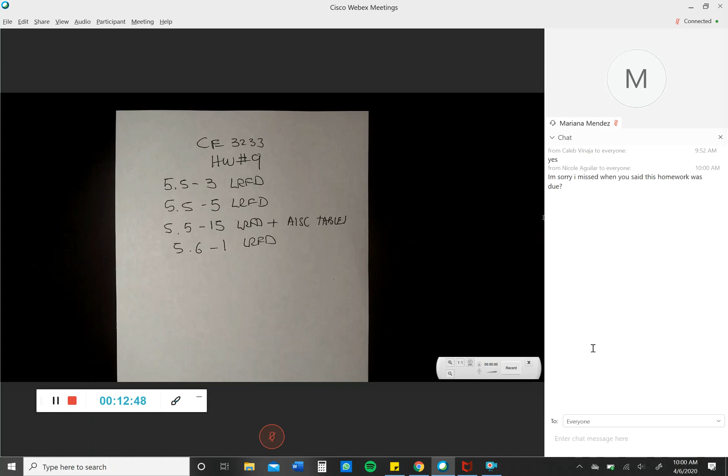No, Nicole, I have not said anything yet. We haven't started. We start at 10. Now I'm going to say, okay, welcome everybody to one more week of suffering online.

This homework is going to be due the Monday after the exam. This homework has to do with beams. Beams is not included in this exam, so this homework is due the Monday after the exam. The only thing included in the exam is the bonus from exam number one, and everything related to weld and columns. So beams are not part of the exam, but this homework is due the Monday after the exam.

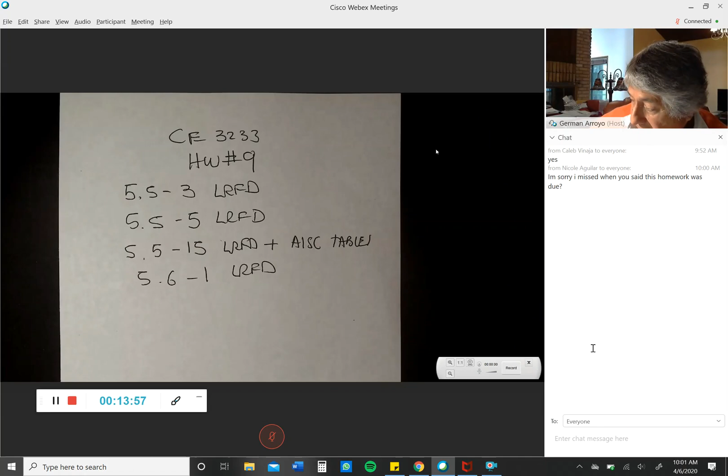I want you to pay attention to what I have to say and show you. I know you're worried about the exam and stressed out because of too many online courses and family problems. I understand, and I'm going to try to help you, so pay attention. I know some of you are still in bed, some are still driving, some will be here later asking about this.

Look, number one, the exam is going to be open notes, open book, open solution manual, everything is going to be open.

However, number two, don't talk to anybody, don't help anybody, help yourself. Because if you work as a group, somebody's going to tell me, and all of you, one of the group is going to get an F. If somebody asks you a question on the phone, say no. I'm trusting you. Number two is the most important part of the exam.

The exam will start at 7 o'clock. You're going to download the first question from the folder. Before that, please turn that mic off. Turn that mic off. So the first question—I don't know who you are, Amira, I think—turn that mic off.

So the first question, next week on Tuesday at 7 o'clock in the morning, you're going to download the first question. I will also display the first question on this screen, so you'll have it in front of you for an hour if you need it. Also, the chat is going to be on so you can ask me questions, but you'll have to turn your mic off during the exam and keep your webcam on so I can see you.

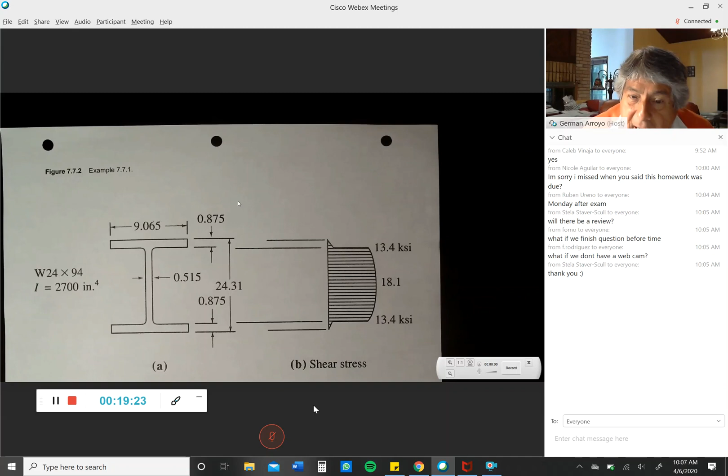What I want you to understand is that for a wide flange beam, and you remember this from mechanics of solids, this is the shearing stress distribution. The shearing stress distribution is always different depending on the cross section, it has a different shape. The cross section used most for beams is a wide flange. If you remember, it's zero on the outside, maximum at the neutral axis.

But most of the shear stresses are resisted by the web. So the code assumes that the web, all the depth times the thickness of the web, is resisting the shearing stresses. The code assumes this is a rectangular shape, because most of the shearing stresses are resisted by the web. The code assumes that the web is resisting all the shearing stresses.

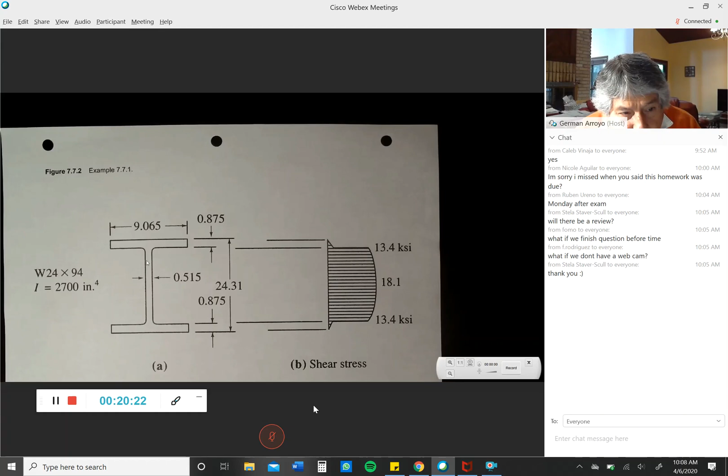So I want you to go to chapter G, page 16.1-70. Chapter G, 16.1-70.

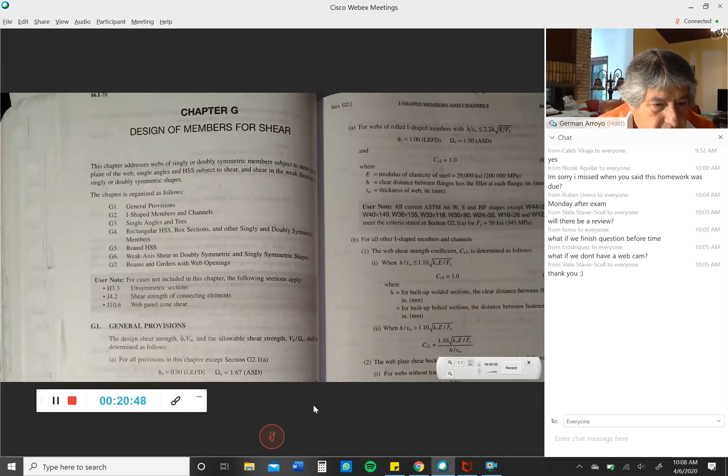For shear, you have to be very careful, because for LRFD you have to use phi equals 0.9 with the section given on the next page. The shear strength equation, this is the nominal strength, is 0.6 Fy times Aw, which is the area, the depth and the thickness of the web.

I'm going to solve the problem related to this on the next page. And you have to be very careful because it's for I-shaped members. This is h over tw. Whenever this is smaller than this value, phi is 1.

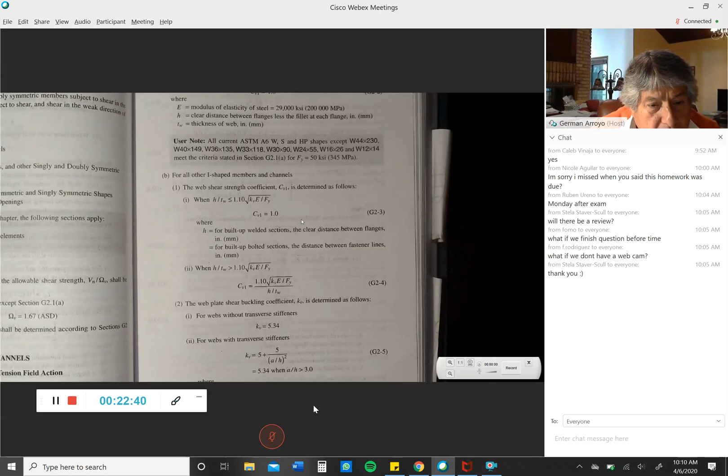Phi is 1 instead of 0.9, and the shear factor Cv is 1. There are other conditions. If you look at this value here, there are conditions where the value of Cv is computed, like given here. We're going to do that later. What is important to know is that the code assumes that all the shear stresses are resisted by the area of the web.

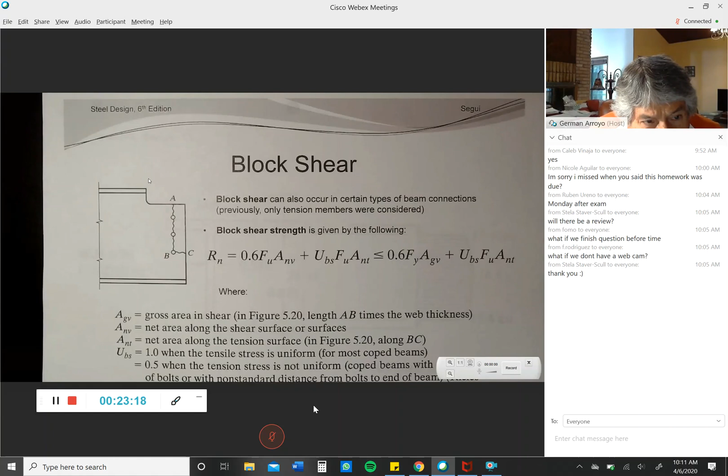Another thing that is important to know: whenever we have beams, you cope the beam to be at the same floor level, you're going to have it here, the flange of a girder. So to be at the same level, you need to cope the beam. In this case, there is a block shear. This is the gross area in shear, the net area in shear, and this is the gross area in tension and net area in tension.

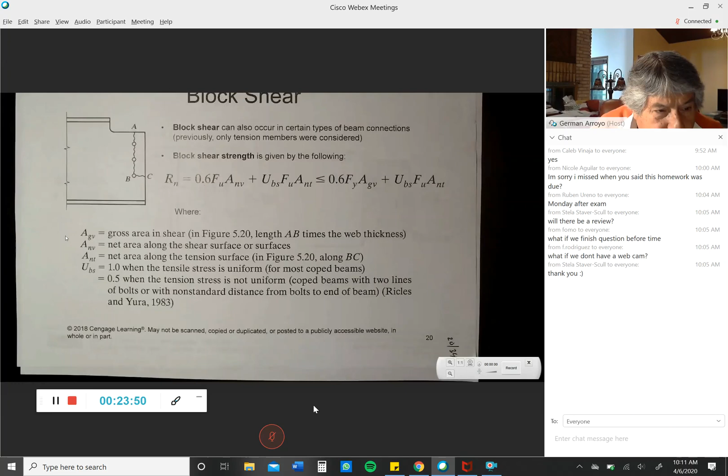And in here, you can see that this is the same block shear equation that we used before, the same definition for the gross area, for the net area. This is important: this value of U still is 1 for most of the cases.

However, based on research, it is 0.5 when we had two lines of bolts. So this is one line of bolts, whenever we had two lines of bolts it would be 0.5. I want you to remember that.

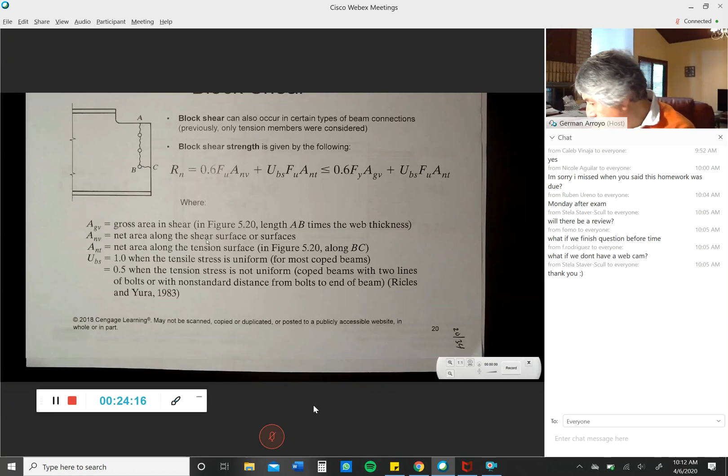And the last piece of information I want to give you is about flexure. Whenever we do beams, we have to check the strength based on moment, sigma equals MC over I. The strength based on shear, we look at the shear stress, tau equals VQ over It, and deflection. Deflection is based on service load, we do not factor the load.

So deflection, whether LRFD or ASD, is always based on service load, we do not factor the load. In addition, normally the dead load deflection, whenever you load the structure during construction, is already taken care of, already taken place. So the only thing we consider is the live load deflection, and you can see that the textbook says the same.

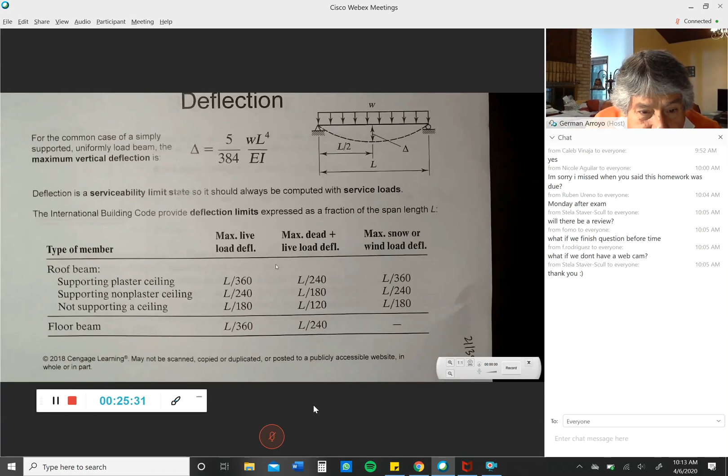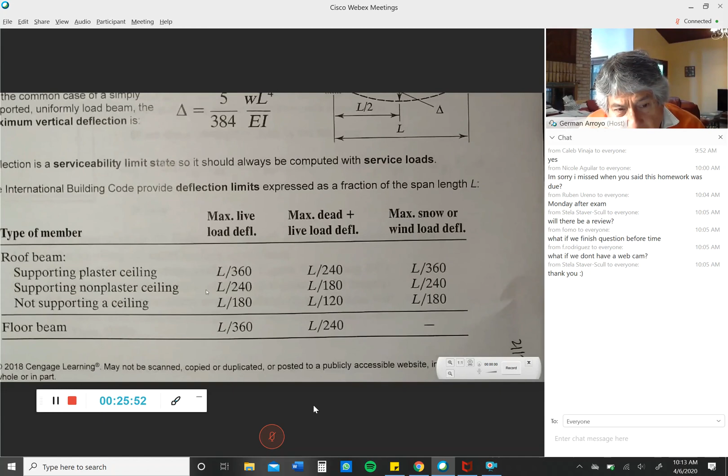So all that we're going to be looking at is L over 360, L over 240. Typical for floor beams, L over 360 and L over 240. But this is just based on live load. And I will tell you to use L over 360 or L over 240, this will be given to you. They have to be in inches, so the span has to be multiplied times 12.

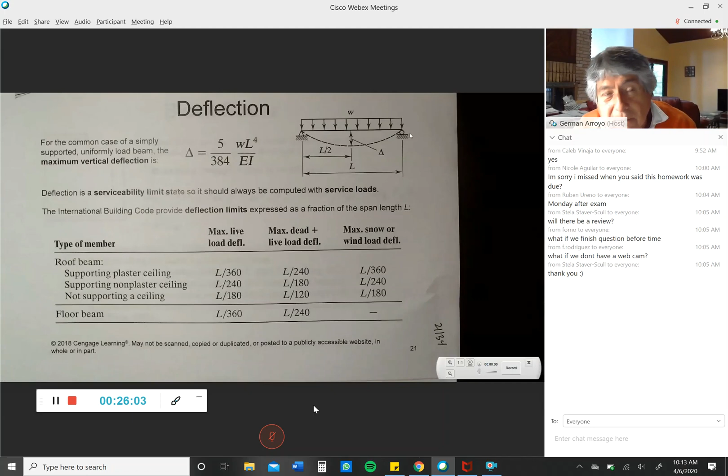But it only uses the live load. And this is a typical formula, you can find this at the end of chapter 3, typical deflection formula, always in inches.

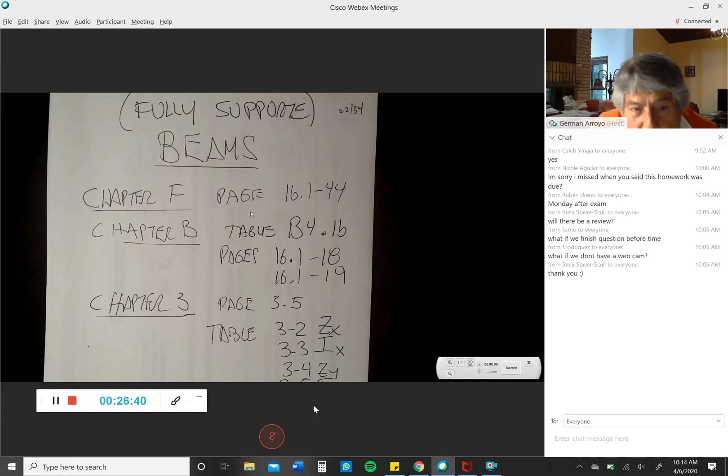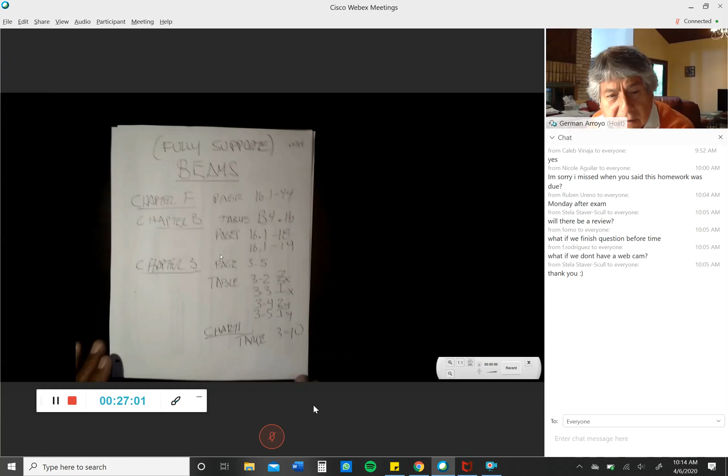So today we're going to do our first design. And like I mentioned to you last week, we're going to be looking at chapter F that deals with bending or flexure, chapter B that had a table for h over tw and b over 2 times the thickness of the flange for local buckling. And in chapter 3, we saw the other day that we had a table for Zx plastic modulus, Ix moment of inertia about the strong axis, Zy and Iy. Later, after our exam, we're going to be looking at different types of beams.

Also, we're going to be using a table in chapter 3. Something that I want to point out in chapter 3, I mentioned it to you before, but now I'm going to show you where to find it. Go to chapter 3, page 5. Chapter 3, page 5.

This is what I showed you before. This is horizontal, this portion is linear, after that comes a parabola. This is when we develop the plastic moment, and in chapter F they call it yielding. This is when phi M sub N is equal to phi M sub P. And this point, if you go down below, corresponds to L sub P.

So all the problems we're going to solve today related to beams have this condition. They call it fully supported compression flange, so the compression flange is not going to buckle. We are not going to have what is called lateral torsional buckling, or LTB. It's not going to happen in this chapter.

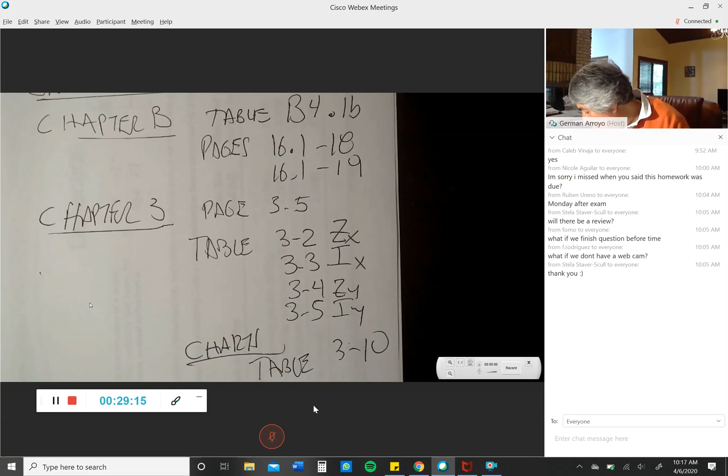Our first problem, this is page 23 of our notes. Here on top it says continuous lateral support. That means the compression flange is not going to have lateral torsional buckling. This is what I told you before, that the compression flange could be encased in concrete. That's called continuous lateral support.

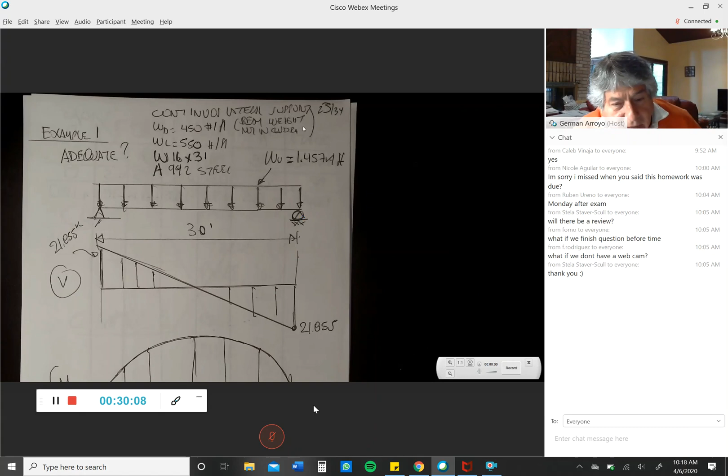We still haven't set here the support. The beam is still determinate. We have a pin and a roller. What they're saying is that the compression flange is encased in concrete.

The dead load is 450 pounds per foot, and the weight of the beam is not included. The live load is 550 pounds per foot. And when you look at this, W16 by 31, that means 31 pounds per foot.

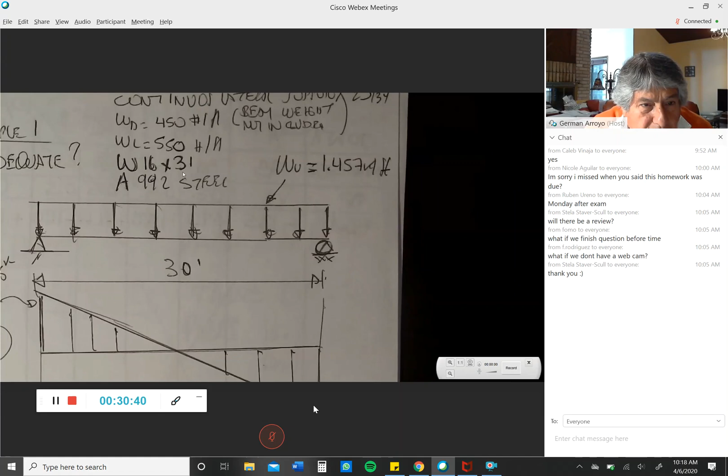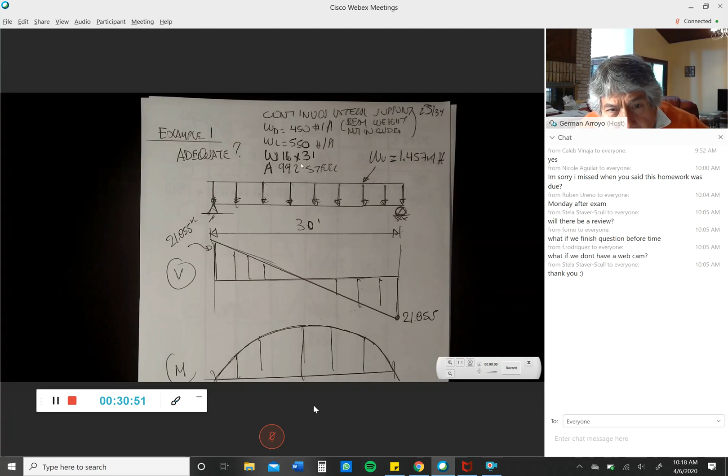So the load we have is 450 dead. I need to include the weight of the beam, 31 pounds per foot, to this dead load. So down below here I have computed W sub U, the dead load per foot in kips. This is the weight of the beam, 31 pounds per foot divided by 1,000 to get kips, which gives me 0.031.

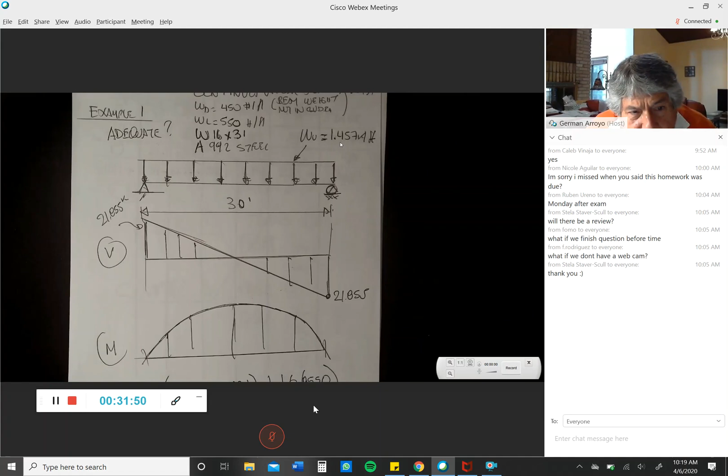Given that load plus the weight of the beam times 1.2, the live load times 1.6, this gives me 1.457 kip per foot. So this is the load that we have, 1.457 kip per foot. If you multiply this times 30 and divide by 2, it gives you the reaction, this value, 21.8 kips.

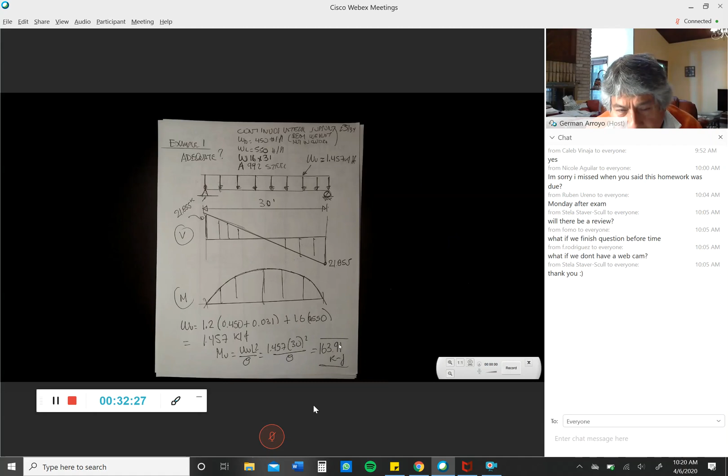This is the reaction. 1.457 times 30 divided by 2 gives you the reaction. The maximum moment is W sub U times L squared over 8: 1.457 times 30 squared over 8 equals 163.91. So we have to provide a moment capacity larger than 163.91, so we need to check.

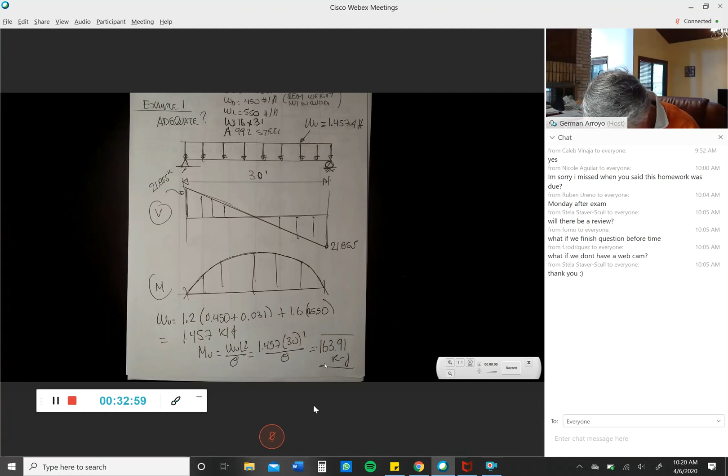They want to know: is this section, the W16 by 31, able to resist 163.91 kip-feet? Since this is fully supported, the compression flange is fully supported, in chapter F they say that the limit state that applies is yielding.

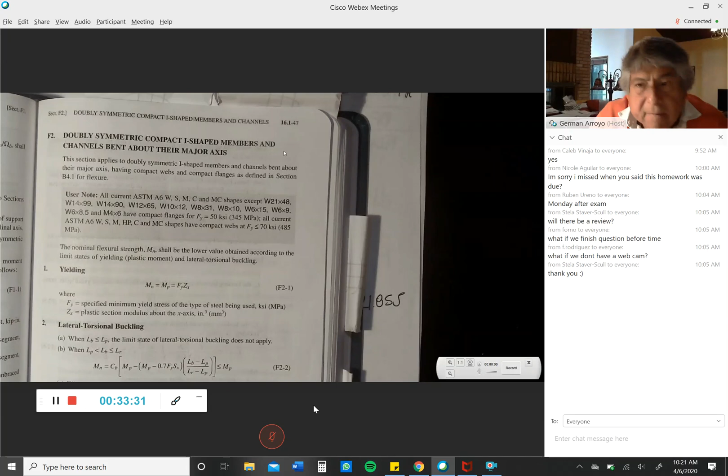So I want you to go to chapter F, page 16.1-47. In this page it says that the limit state yielding applies whenever the compression flange is fully supported, or the bracing of the compression flange is equal to or smaller than L sub P.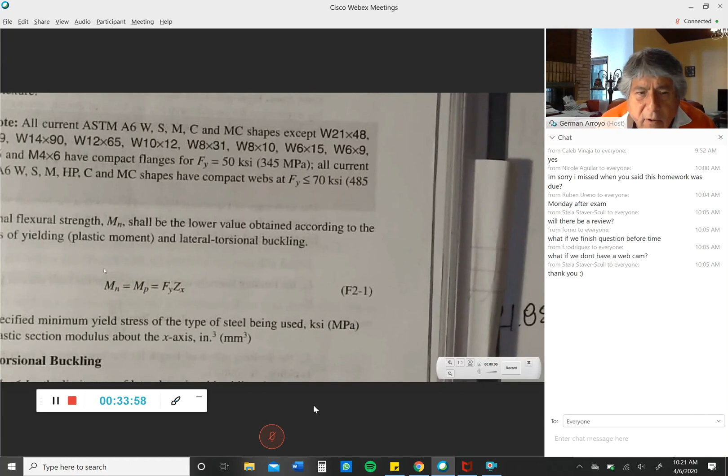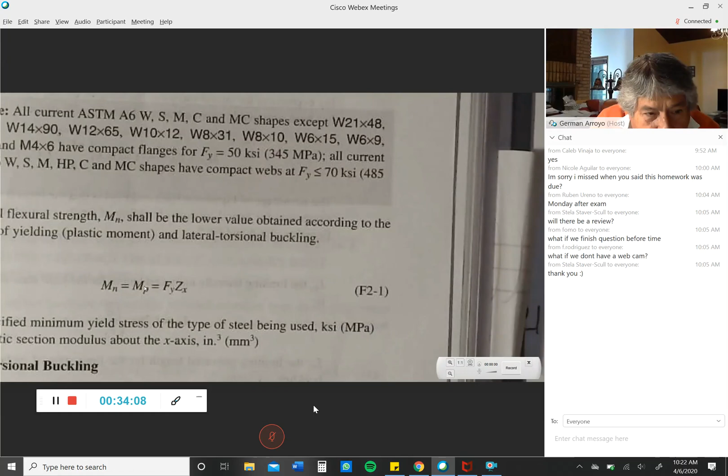In this case, the limit state yielding says that the nominal capacity, for both LRFD and ASD, is the moment that we're going to develop: the plastic moment, fully yielding of the cross section. The shape of the stress diagram on the cross section is rectangular. So for LRFD, phi M sub N is equal to phi M sub P, equal to phi F sub Y Z X.

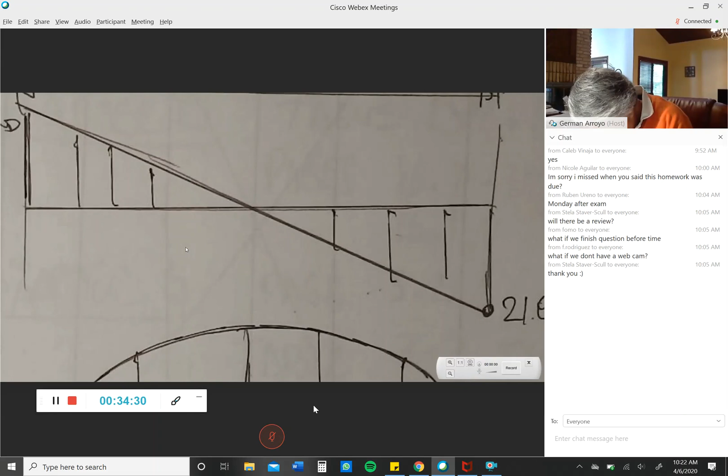In addition, we need to go to chapter B. This is the table in chapter B on page 16.1. This is the table that is for beams. Don't get confused with the previous table that's for columns. Make sure you understand there are two tables, one for columns, one for beams. Beams, we call it Flexure.

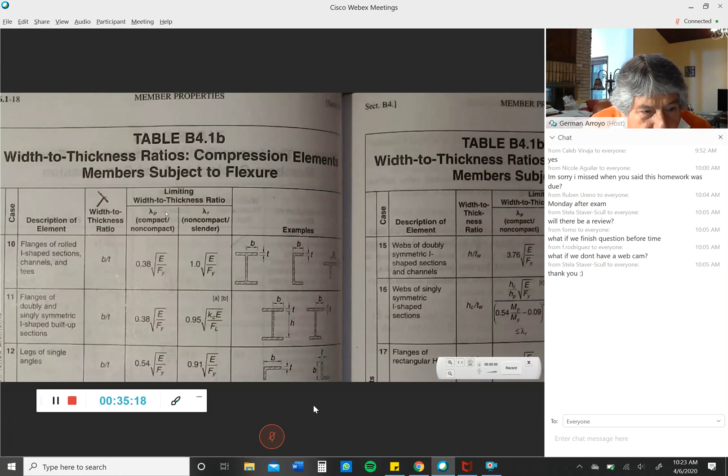So in order for the section we're dealing with to develop the plastic hinge, local buckling should not take place. That's why we have to check B over 2 times the thickness of the flange. Why B over 2? Because look at this, this is what B is in this equation. So B over 2 times the thickness of the flange has to be smaller than lambda sub P, and this is given in chapter 1, this value.

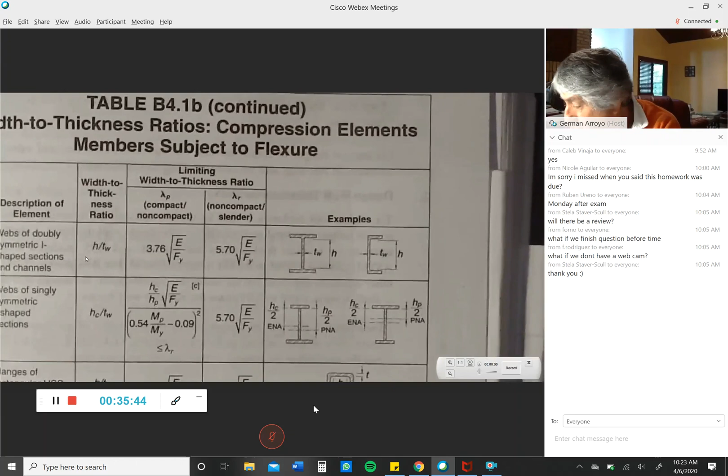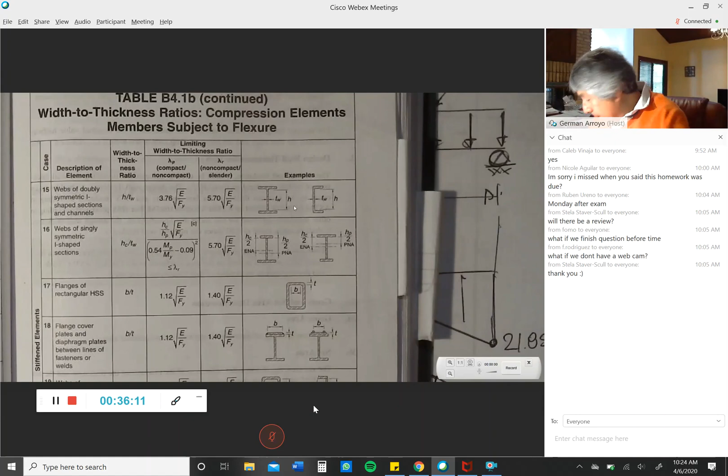For the flanges, on the next page, for the web, we had H over TW. H over TW is smaller than this value, so this is also given in chapter 1. So from chapter 1, we already done it before.

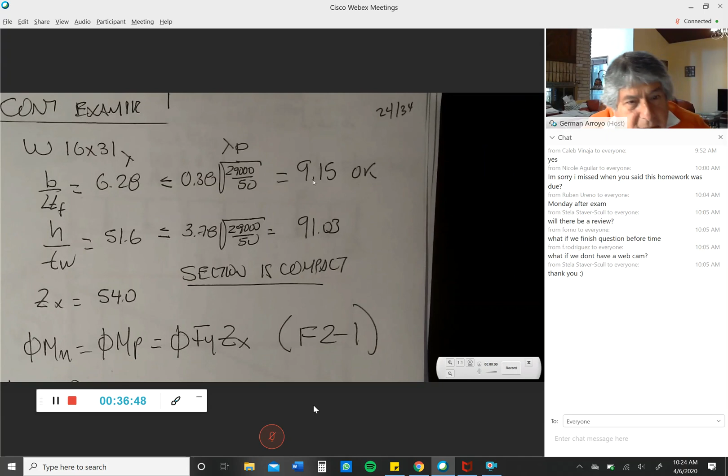B over 2 times the thickness of the flange for the W16 by 31 is given as 6.28. This is our value of lambda. It has to be smaller than 0.38 times the square root of 29,000 over 50, since FY is 50, that gives 9.15. 6.28 is smaller than 9.15, so no problem with the flange.

The web, H over TW, this value comes from chapter 1. For W16 by 31 it has to be smaller or equal to 3.78 root of 29,000 over 50, which is 91.03. It's smaller, so no problem. So the section is compact.

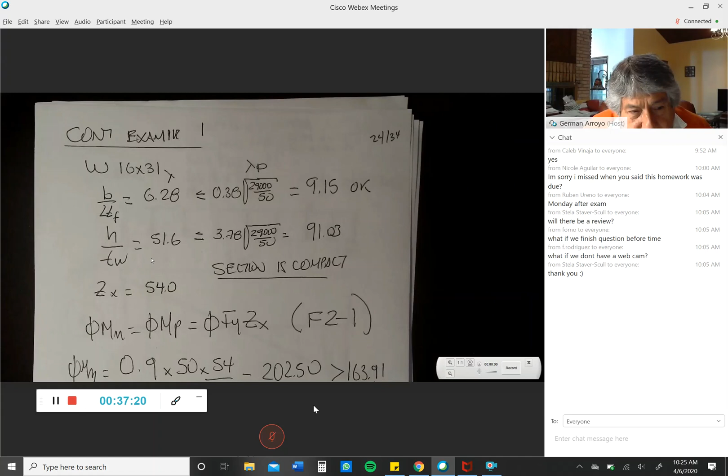This value Zx comes also from chapter 1 or from chapter 3. This is the plastic modulus of this section, W16 by 31. So this comes from chapter 1, whenever we had a 16 by 31, or it comes from chapter 3. I'm going to show you later how to use chapter 3.

Since we have full support of the compression flange, no lateral torsional buckling will happen. We do not have local buckling of either the flange or the web. Yielding is the limit state, this is what I show you.

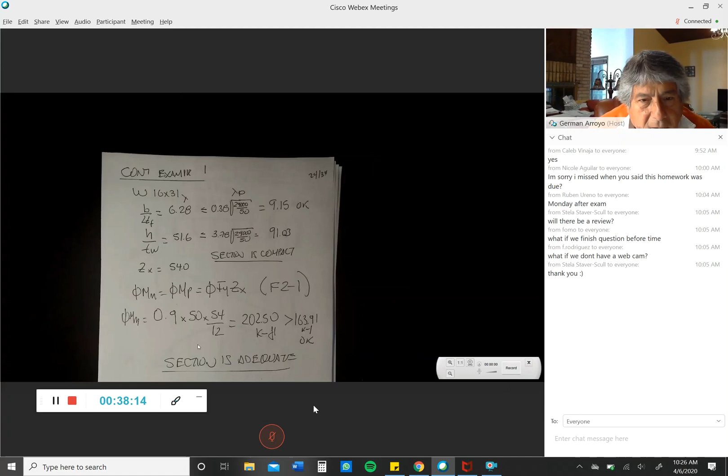Phi Mn equal to phi M sub P, phi FY Zx. And this is the equation in chapter F, F2-1. The value of phi is 0.9, the value of FY is 50, Zx is 54 inches to the third.

You have to divide this by 12. That gives you 202.50 kip-foot, larger than the one that we obtained when we found Mu, so this value here is Mu, that was WL squared over 8. So the conclusion is that the section is adequate.

Any questions about this problem?

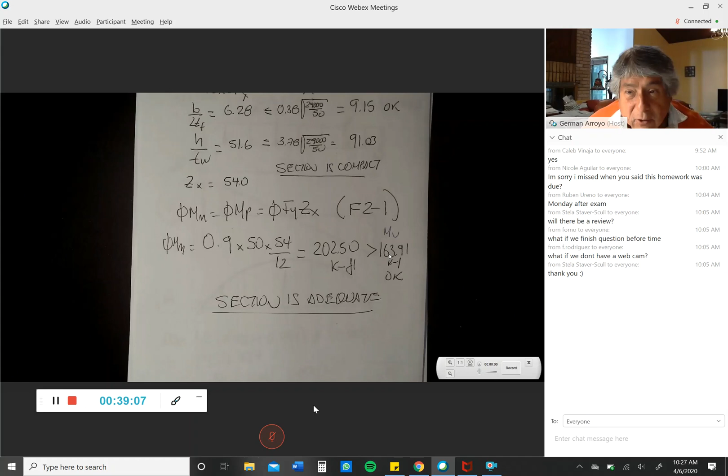It cannot be that clear. Any question? I think that you all went to sleep. I'm going to go to the next problem.

This is page 25, example 2. They give you the W10 by 77. This weighs 77 pounds per foot, and there is continuous lateral support.

In this chapter of the textbook, everything has continuous lateral support, or is braced, compression flange braced at an unbraced length L sub B smaller or equal to L sub P. And you can see this in the field. I don't know if you were able to go to the field or not, but this is very simple, you can see it in it.

So they want to know what is the maximum point load, live load that can be applied to this beam. And this beam here has the load at mid-span. I have factored the live load by 1.6. The only dead load that we had is the weight of the beam.

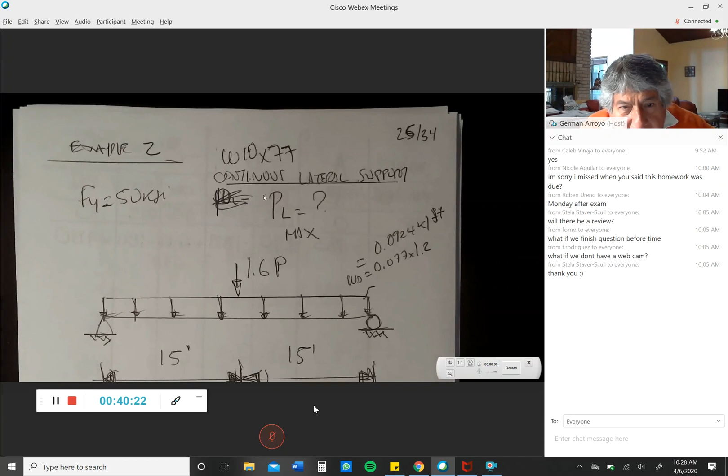So you can see here that I had divided the 77 pounds per foot by 1,000, so I have here 0.077 kips per foot times 1.2. So the dead load is 0.0924 kips per foot. So we have factored the dead load, we have factored the live load, and this is our problem.

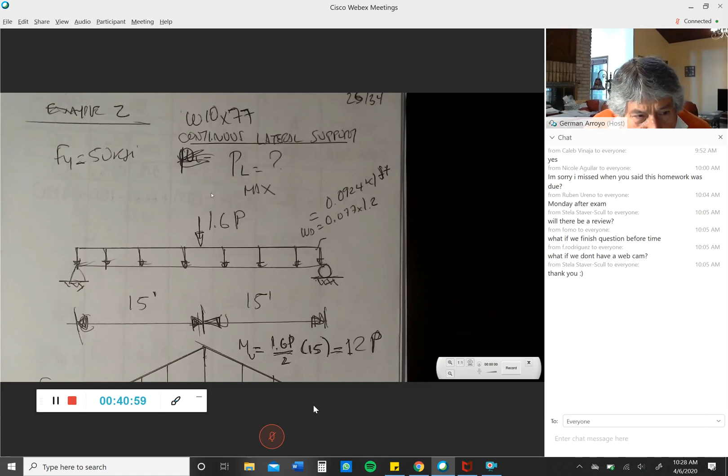I had broken this into two diagrams to add the moment produced by the point load to the moment produced by the uniform load. You have to be good at structural analysis, because if the load is not in the center, you have to find the location in the shear diagram where the shear is equal to zero.

Because when the shear is equal to zero, the moment is going to be maximum. And here, because of symmetry, the moment is going to be maximum at the center of the span. So 1.6 times this load divided by 2 times 15.

So in this diagram, 1.6P divided by 2 is this reaction. Multiply times 15 feet, this moment here, in terms of P, is 12P.

The moment produced by the uniform load is still Wu times L squared over 8, 10.40. So the moment that I had to design for is 12P plus 10.40 kip-foot. This is just structural analysis, and I know that you're very good at this.

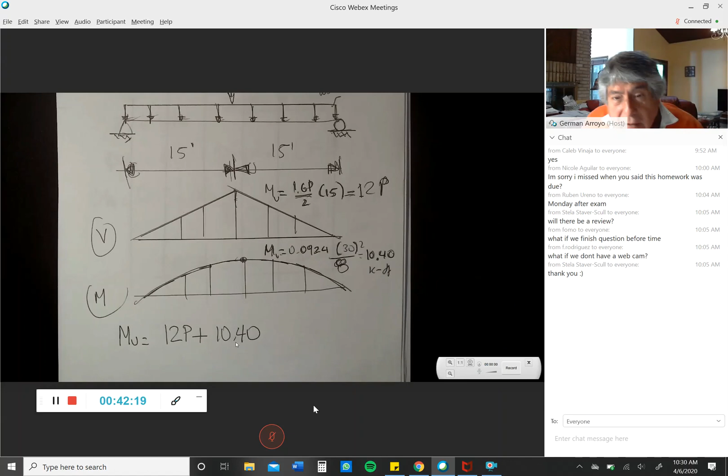So what we had to do, we had to equal the moment capacity of the W10 by 77 to the required moment, that is 12P plus 10.4. And this is what I had done on the next page.

Can we use table 3-23? Right now I want you to use calculation. It's good for you to understand how to do the calculation. I always want you to do calculation. Whenever I tell you don't use calculation, use a table, I will point that out. But I'm glad you asked that.

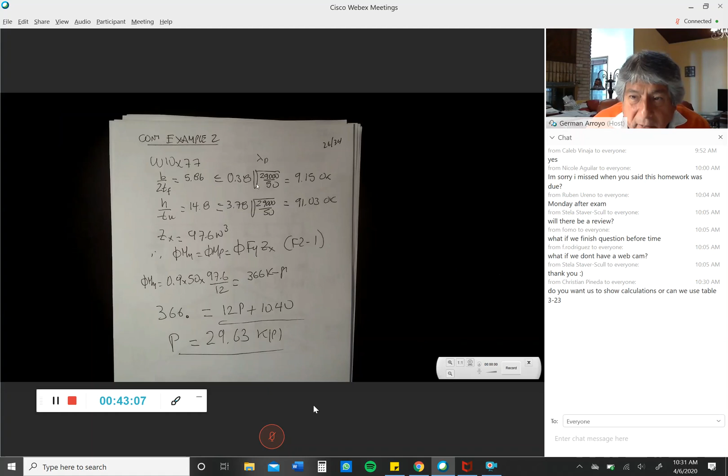Okay, so look, chapter 1, W10 by 77, B over 2 times the thickness of the flange is smaller than this value, no problem with the flange. H over tw, 14.8 is smaller than 91.03, no problem with it.

ZX comes from chapter 1 or chapter 3, and this is the equation. We do not have problems with the flange, no problem with the web. And fully supported compression flange means no lateral torsional buckling.

Yielding is our limit state, the same as before. The nominal strength equal to the plastic strength, phi FY Zx. The Zx came also from chapter 1, or it could come from chapter 3, from table 3-2. I'm going to show you that much later.

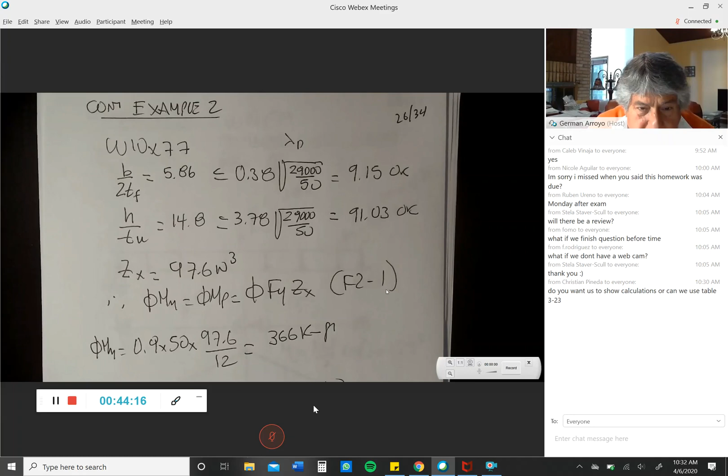So we have 0.9 times FY ZX divided by 12 — don't forget to divide by 12 — giving 366 kip-foot. We're going to make this equal to the required moment, and from here it came to 29.63.

Now we're going to go to table 3-2, chapter 3, page 3-23. This is the table for ZX that I mentioned last week.

In this table, ZX is only for 50 KSI. For yielding, the equation we're using is a linear equation because phi M sub n equals phi M sub p. Phi is a constant, Fy is a constant, Zx has nothing to do with the type of steel — Zx is a property of the geometry. So the only thing we need to do to the value here for phi M sub p for any type of steel is divide it by 50 and multiply by the required Fy.

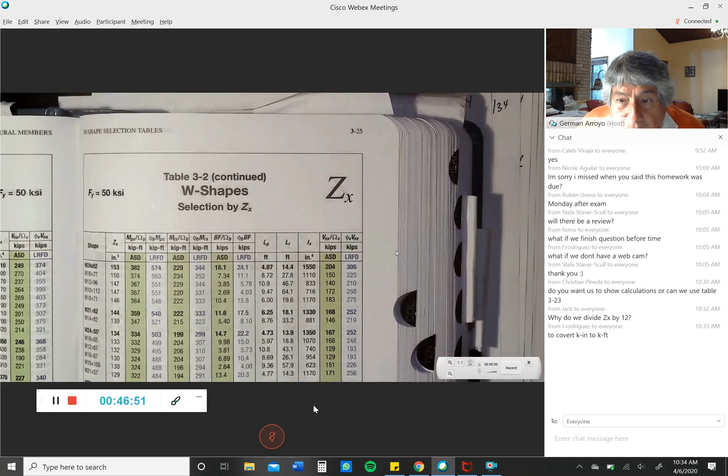On page 3-25, go to page 3-25. We always use kip-foot. Somebody — I think Fernando Rodriguez — is answering the question. Yeah, because let me finish with this. I'm going to go back to show you the unit.

At the bottom of this page, we had a W10 by 77. What is the value? Anybody type, what is the value of phi M sub P that we had in here? 366. And what is the value that we computed? Look — exactly the same value.

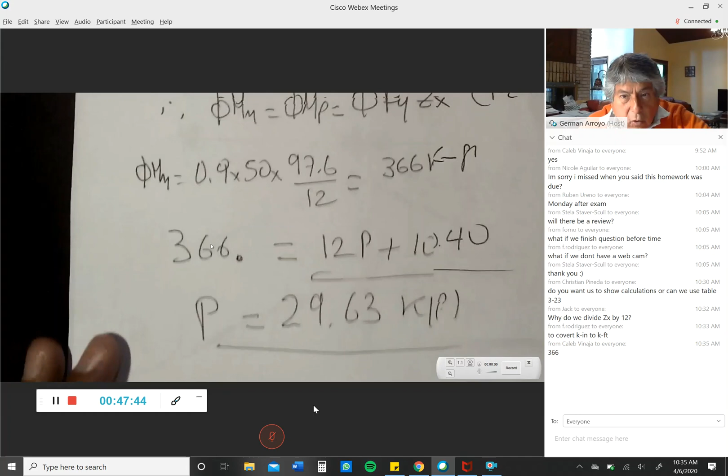So we're going to use this table, but right now I want you to know where this value comes from. There is a question about the units. Look, 50 is kip per inch squared, and this is inches to the third.

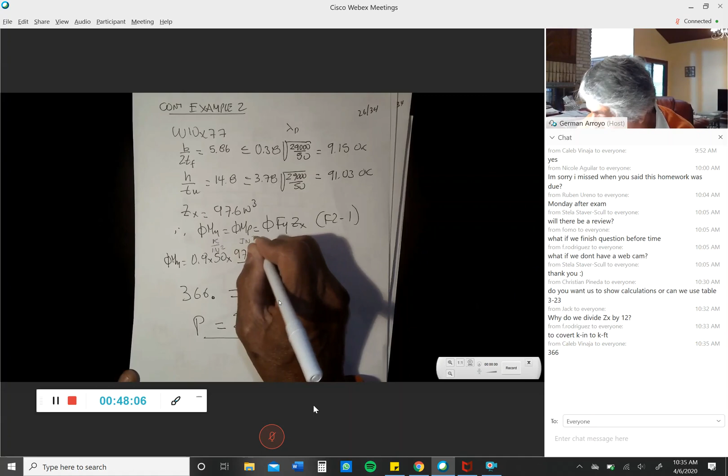So 50 kip per inch squared, this is inches to the third, so when we multiply this, what are the units? If I multiply this times this, what units remain? Before dividing by 12, it's kip-inch, so we need to divide by 12 to get kip-foot, because everything is given in kip-foot.

Any other question about this problem, or any problem? So I'm going to go to the next one that is a little bit more difficult.

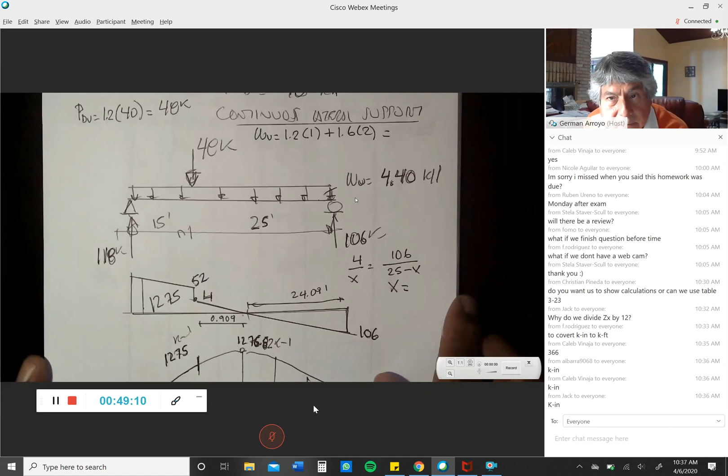This is page 27. They give you the dead load that says the weight of the beam is included: 1 kip per foot, the weight of the beam is in. The live load is 2 kip.

For the first time, we're going to check deflection. The maximum deflection produced by the live load, service load, and factored load. Service load live load is L over 360. There's also a point load, a dead load of 40 kip.

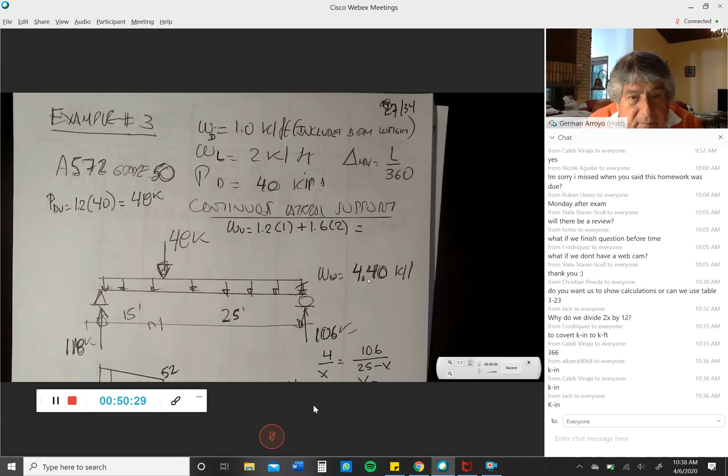So what I had done here: I have factor 1.2 times 1, plus 1.6 times 2, that gave me a factored load of 4.4 kip per foot. The 40 kip here is a dead load, not a live load, so times 1.2 gives me 48.

So this is the problem that we have right now, and this is just a structural analysis. We have already factored the loads, the point load, the uniform distributed load, but the load is no longer at the center.

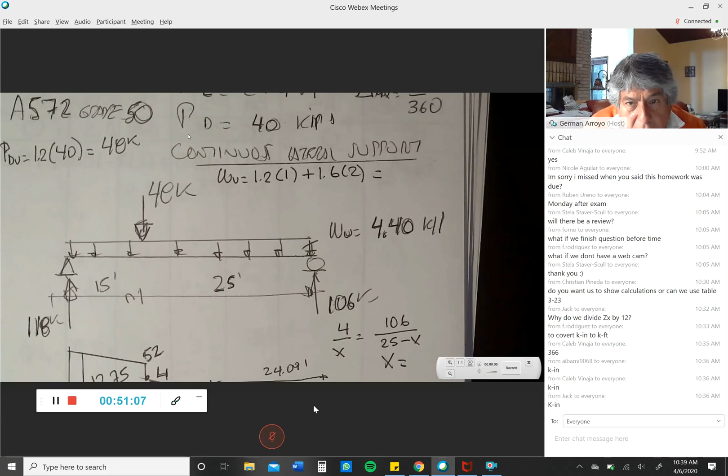Condition of this problem: continuous lateral support. So you have to be careful about that, continuous lateral support.

I had done in here, I have computed the reaction. This is 118, this is 106. This reaction, it doesn't say in the problem that the beam weight is included already. We had to add it, yeah, of course. And I'm going to solve some problem later where the weight of the beam is not included because we do not have any idea of the size of the beam.

So we have to revise our moment. At the end, the MU that we computed for the problem that Nicole is asking, the MU had to be revised. So we had the old MU, we have to add 1.2 times the weight of the beam, in this case, L squared over 8, or whatever location the maximum moment is. And that's a good question.

So I had computed the reaction on the left, 118, and on the right, 106. And this value in here, where the point load is, I had done the shear 118, I had subtracted this 4.4 times 15. So 118 minus 4.4 times 15 gives me 52. And 52 minus 48 gives me 4.

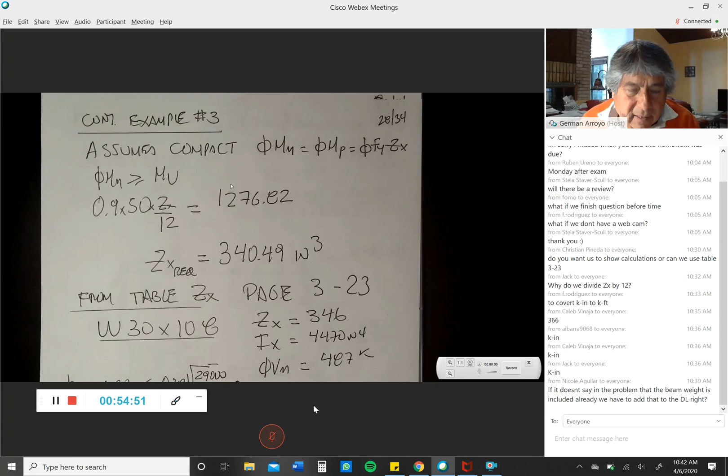Look, in this problem, the section is not given. The previous two problems, the section was given, and here we're looking for the section. So at this time, I don't know what is going to be the lightest section. So we assume that it's compact - that means it's going to be able to develop the plastic hinge.

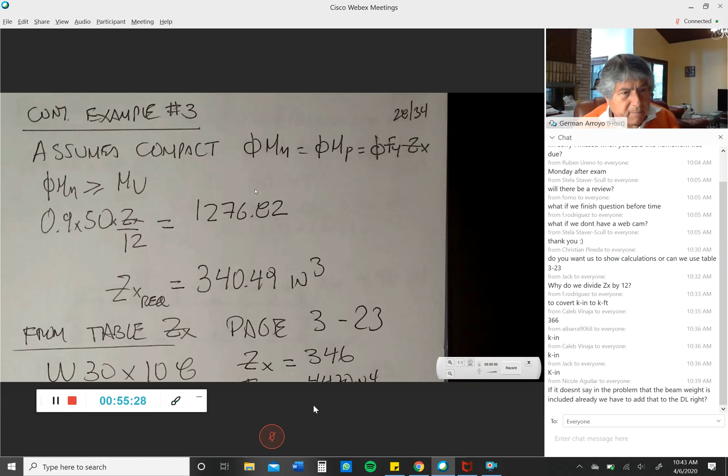If it's compact, phi Mn is equal to phi Mp, phi Fy Zx. This is the equation in chapter F, the yielding equation. Limit state: the whole cross section is going to reach Fy, it's going to develop the plastic hinge. The stress distribution on the cross section, rectangular - on the tension side, rectangular, on the compression side. So phi Mn, the design strength, larger or equal to the required Mu.

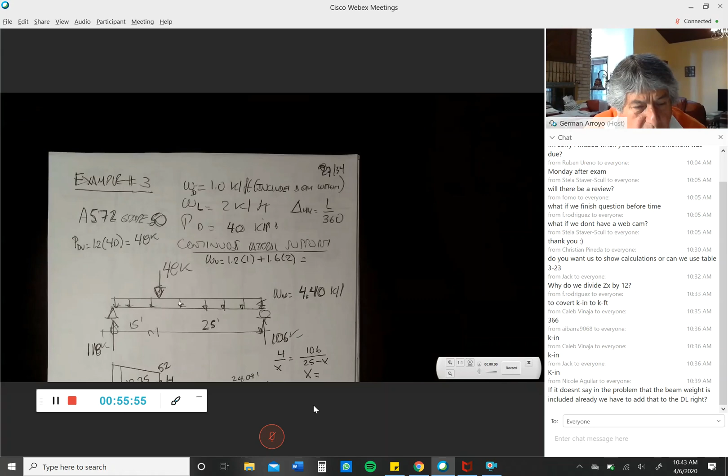0.9 times 50 Fy, Zx is unknown. I have to divide by 12 to keep it in feet because my moment, this moment, comes from the previous page - this is the maximum moment from the previous page, in kip-foot.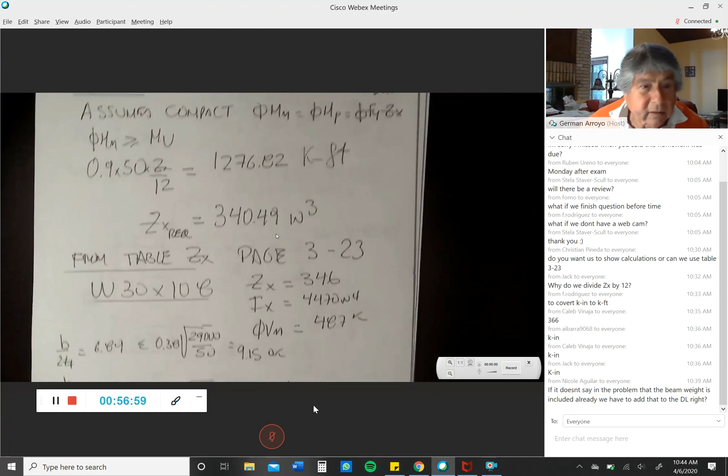So we had no choice but to go to the table for Zx on page 323, and we had to look. I mentioned to you the other day, I'm going to mention again: there are groups. The one on the top of each group, the one that is dark, real dark, is the lightest, the best section of this group. You can see 146, 252, 166, 233, 132, 192 - lightest ones at the top.

So we go and we're looking for 340, for Zx 340. Look in this group, and somebody already gave me the answer. Look, we're looking for 340 or more.

This one, the W27 by 114, has 343. That's what we need. However, this is the lightest one of the group - it gave me more with less weight. So this is the second, like Hugo had put in here, a W30 by 108, and that gave me 346. It gave me a moment of inertia.

If you look in the same page, I-sub-X for the W30 by 108, what is the value of I-sub-X? Somebody write it - 4,400 and something. So W30 by 108, 346, and 4,400 and something.

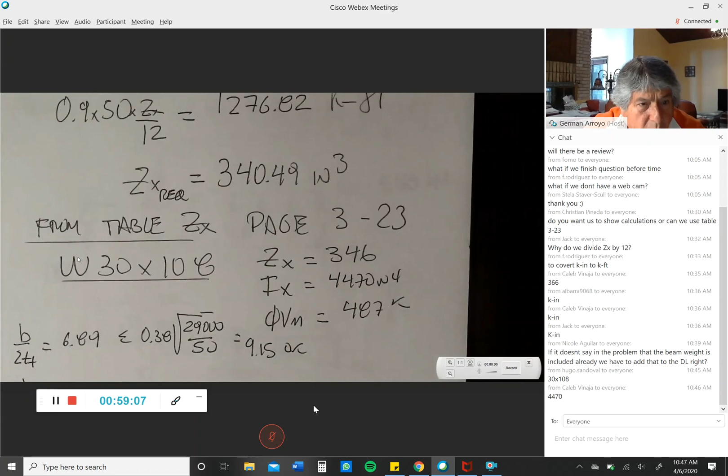So with this required value, we went to table Zx. We found that the W30 by 108 is the best, the lightest one. It gave me a ZX of 346 and a moment of inertia about the strong axis of 4470 inches to the 4th.

Of course, I had to check the flange and the web. 6.89 is smaller than 9.15, no problem. 49.6 is smaller than 91.03, no problem.

For the deflection, you go to chapter 3, page 3-208, that's at the end of the chapter. Whenever we're doing this, I'm going to tell you, go to the end of chapter 3, page 3-208.

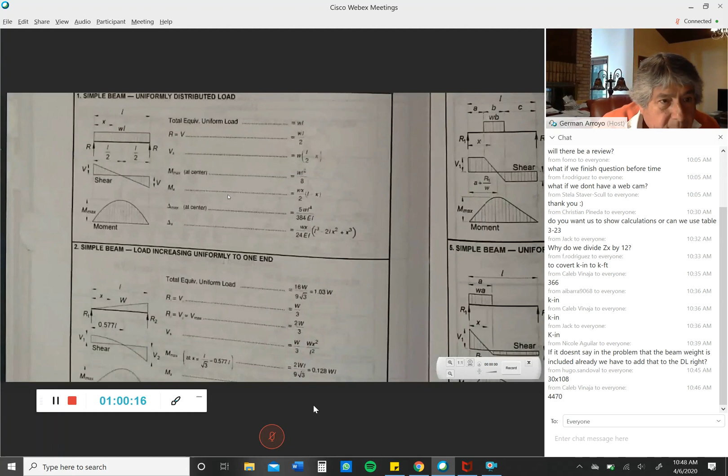In the future, most of you are going to become what we call table engineers. Everything you're going to go to the table. Hopefully you will remember where everything is.

Why am I using this case and why am I ignoring the point load? If you look at this problem, this is the problem we're dealing with. Why am I considering this, and not considering the point load? Anybody? Live load only, good. Live load only, and here, look, this is the live load only.

We consider the deflection produced by the live load because the deflection produced by the dead load already took place during construction, already happened. The one we are concerned with is when the structure is in service. So we only consider the live load. That's why I went to this case.

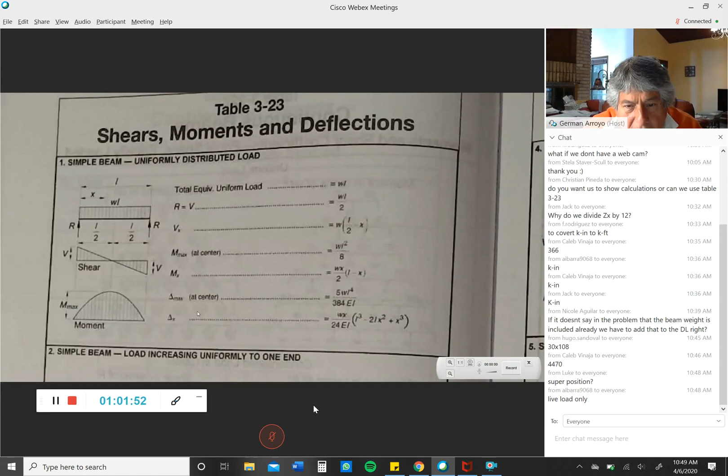And here he said that the maximum deflection happened at the center, 5WL^4 over 384 EI, and this is what I got in here. This is the deflection formula, 5WL^4 over 384 EI. This is the maximum deflection L over 360 that I computed before, 1.33 inches. I is a constant.

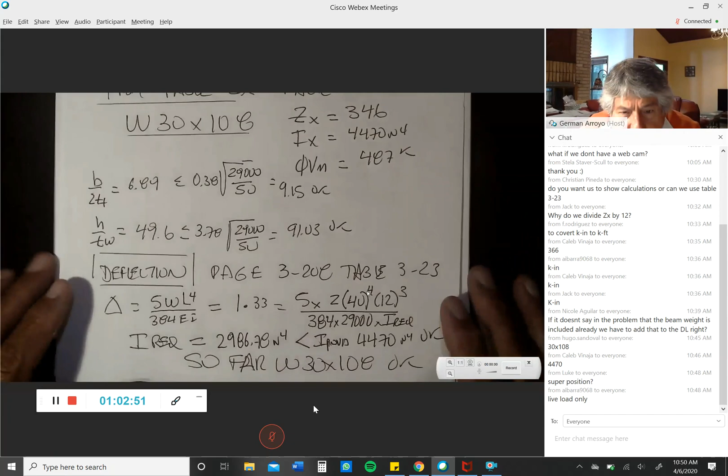Look, if you look at the 40, what is this 40 in here? To the 4th. Anyway, what is this 40 here? Look at the formula. The W is here. What is this W? What is this 2 here?

This is the live load factor, service load, kips per foot. This is the span, like you said, the span is 40 to the 4th. But I need to multiply only times 12 cubed because this 2 is already in kips per foot. So this is already in kips per foot, so I only need to multiply times 12 cubed.

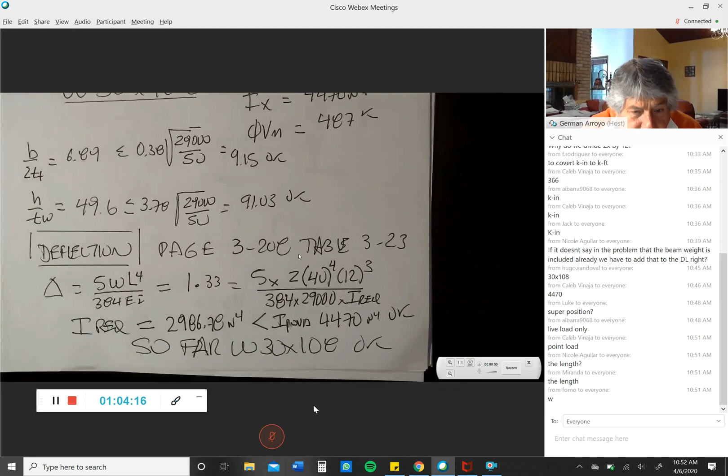384 is a constant, E is 29,000. We calculate what is the required value to produce 1.33. It came at 2986.78, smaller than 4470, so it's okay. So W30 by 108 is the best section.

Yes, I'm going to put W again. When we started the problem, look, live load, service load, 2 kips per foot, and factored load. The deflection, consider only the service load, only the live load. So this 2 kips per foot is unfactored live load.

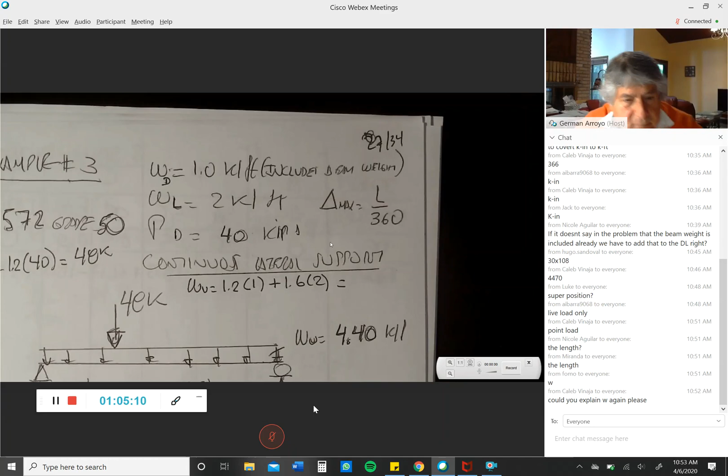When I come to this formula, the deflection is a service condition. It's called serviceability or performance. In today's language, it's the performance of the structure. This is L over 360.

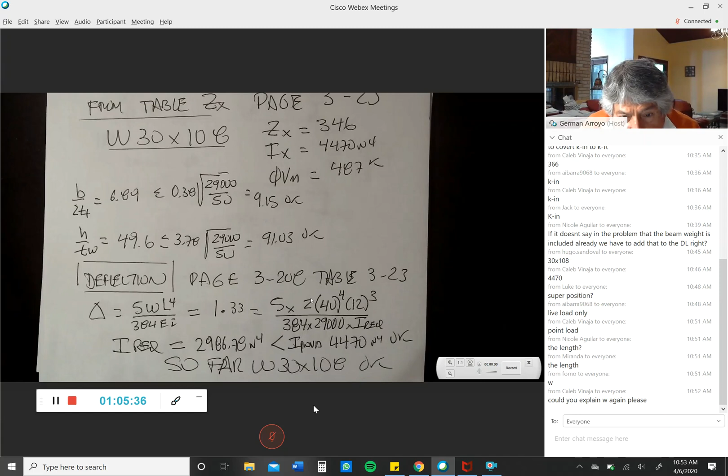This is the live load, the 2 kips per foot. This is the span to the 4th. And this is 12 cubed because this is already kips per foot. So it came to the required value, 2986.78, which is less than provided. The section is okay. Any other question?

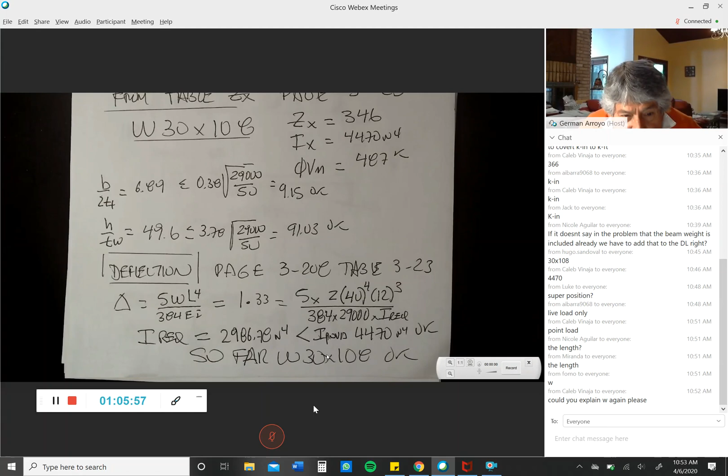Because I need to tell you something else before. If and only if this required moment of inertia is larger than the provided, we have to go to the table on page 328, 329. Chapter 3, page 329. Chapter 3, page 329, page 328. This is the table for the moment of inertia about the strong axis.

Why doesn't it say here Fy equal to 50? Why doesn't it say that in this table? Anybody answer? Why doesn't it say Fy equal to 50? This value, Ix, is based on the geometry, nothing to do with Fy.

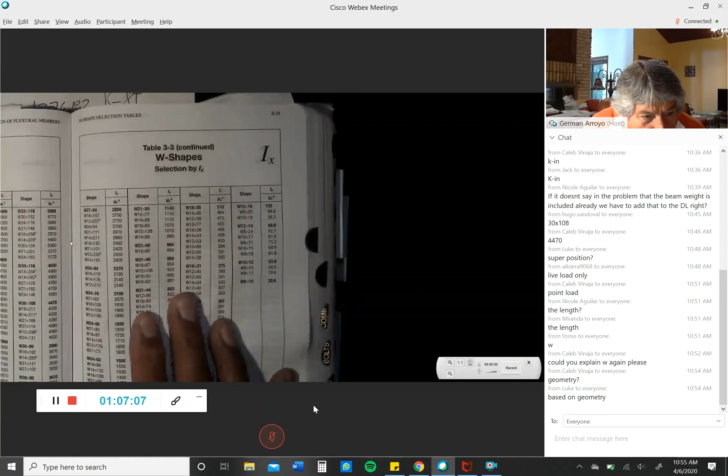But this table, whenever you have a problem with deflection where you need more moment of inertia, you go to this table with the required moment of inertia. The one on top is the lightest section that will provide what you need. We're going to solve problems like that. I need to stop here, I'm sorry it took 5 more minutes.